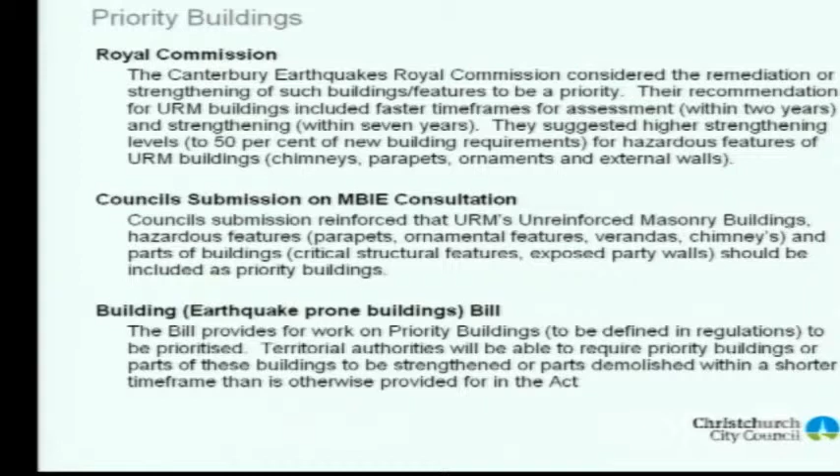In terms of strengthening, a consent for strengthening work activates other upgrading work. So the Royal Commission talk there in terms of Section 112 of the Building Act triggering other upgrading work. That shouldn't happen.

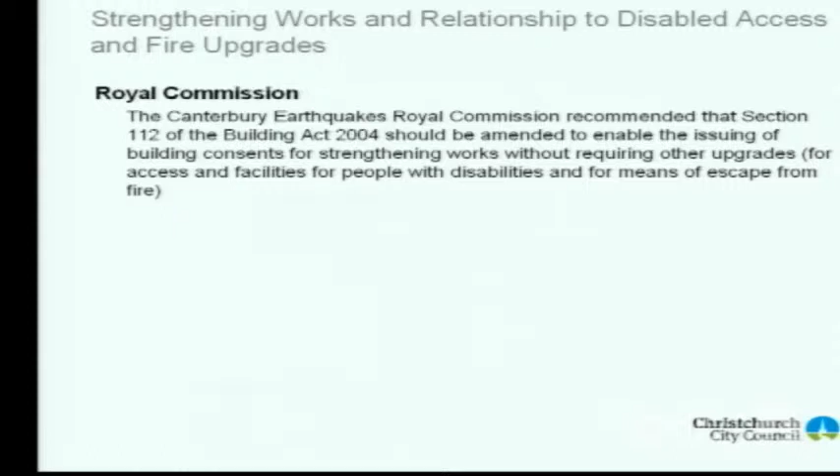Whereas our previous submission contended that that upgrading work is equally as important as the structural upgrade, the bill contains the provision that it may not require that additional upgrading, but there are tools to be delivered via regulation as to how that will be balanced out. In terms of the bill, it contains regulations that will be set in terms of tools that we use.

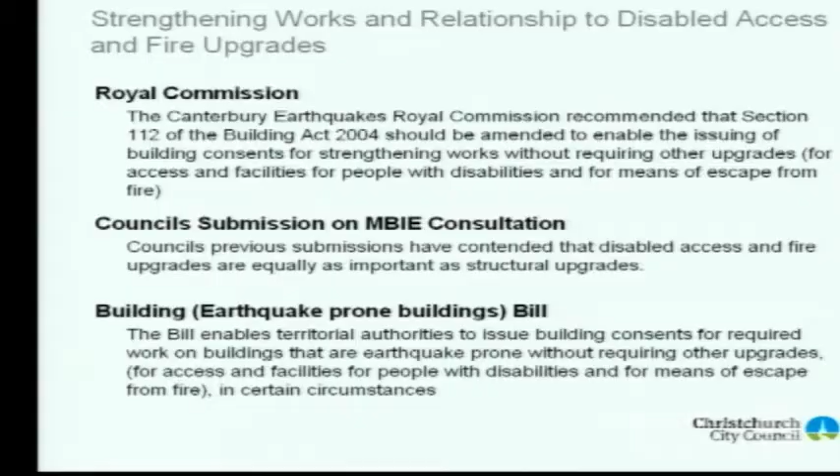To clarify these issues, we do get asked or provided with a consultation facility on some, but not all. At the moment the bill's drafted so that there's only a specific requirement to consult with the councils on the seismic capacity assessments. It appears we're not necessarily going to be consulted on what's a priority building, the criteria for exempting buildings, and on this aspect. So we'll need to include that in the submission — that we should be consulted.

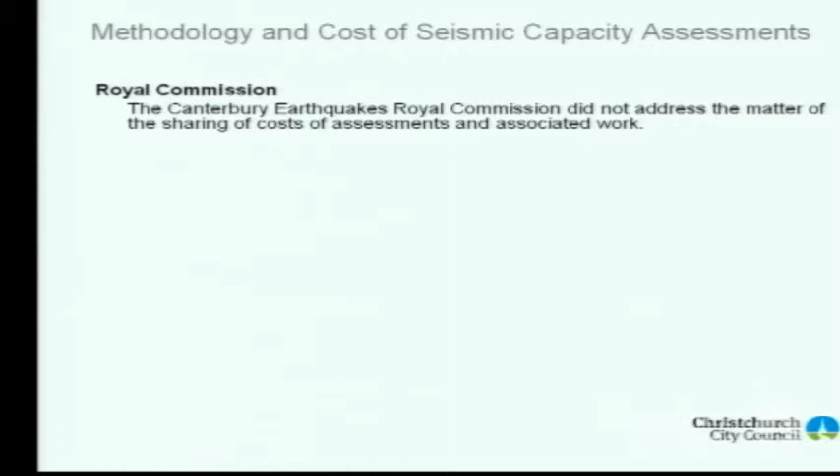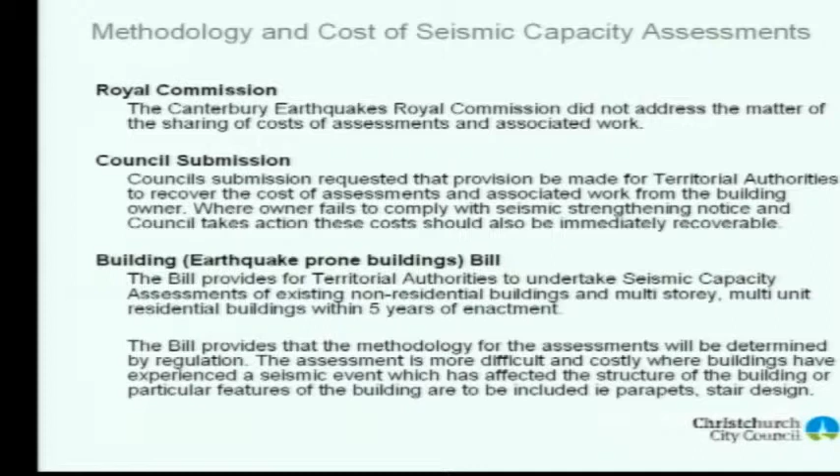In terms of the methodology and cost for seismic capacity assessments, the Commission didn't address this issue. Our previous submission moved along the line that we need to be able to recover costs from dealing with the associated work, and also we've raised issues around where the obligation falls back to the council to deal with the building — how is that cost recovered? The bill itself doesn't address those issues, and while we have existing procedures for recouping some costs in terms of doing immediate work, our view is that these recovery mechanisms aren't fast enough.

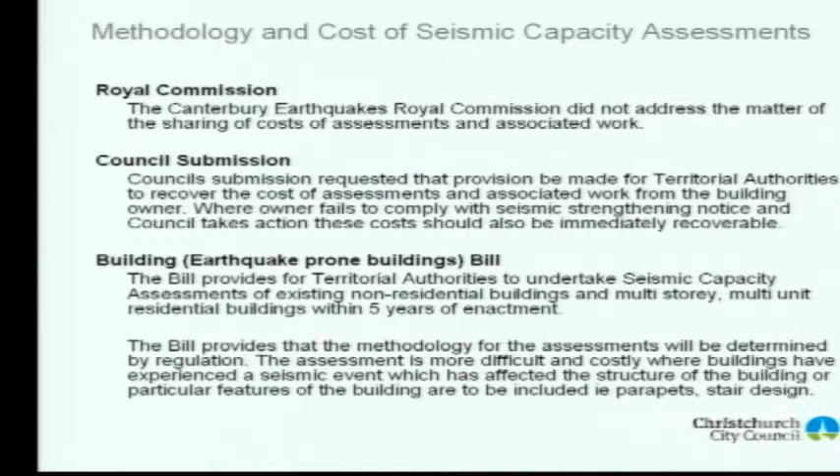Do you want to mention anything about it? No.

Heritage buildings. The Commission recommended the immediate securing of dangerous buildings, that they shouldn't be impeded by the requirements to deal with the regulatory process. Our submission previously supported that heritage buildings should be preserved and retained wherever practicable, and the benefits of heritage protection should be balanced with the safety concerns.

The bill provides that Category 1 historic buildings under the Historic Places Act may apply to the council for an extension of up to 10 years to complete any seismic upgrading work. As part of that extension process, there is an obligation for the owners to manage the risk. Once again, this is a scenario where some regulations or criteria are going to be formed as part of the bill and provided back to the council.

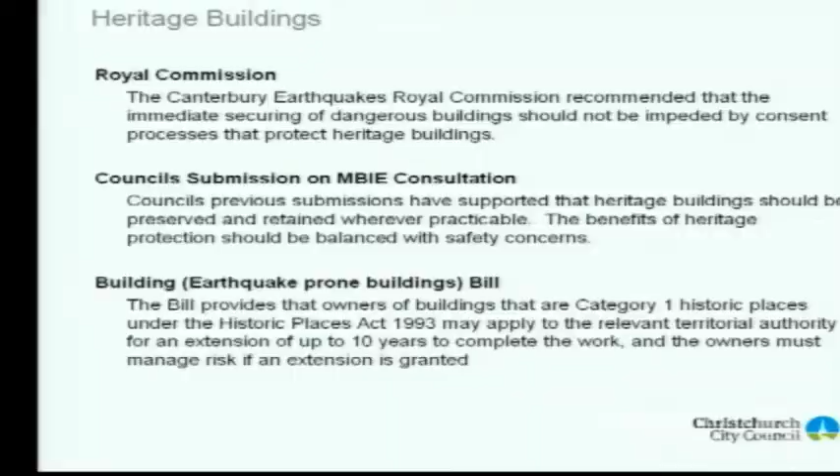Thanks, that's great. Well, with the motion that we refer this back, I just want to thank everyone for the tremendous work you did in a very short space of time to present to us the different stages, because that additional stage of the advice the council gave to MBIE when they did the original discussion document has certainly enabled me to get a much clearer picture of the consistency of the position the council has adopted throughout. But I think it's our obligation as the Christchurch City Council to present very strongly in support of the Royal Commission recommendations. We owe it to the people whose lives were lost and who were severely injured when buildings collapsed in the earthquake. So it is something I think we have an obligation to take on. Thank you very much for all of the effort you put in.